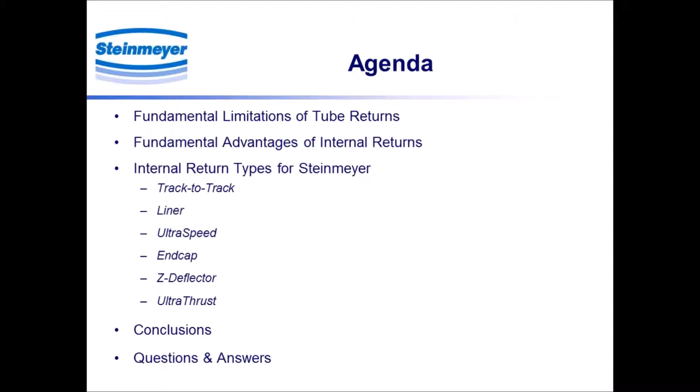We'll get into some particulars about the Steinmeyer design philosophy. And as you see here, a list of really 6 major return types that fill out the Steinmeyer product line. They're all driven by that philosophy. And then we'll wrap up with some conclusions and hopefully answer your questions. So let's get started. And I always like to start with a bit of history. I think it helps to understand where you've been, to understand where you are right now.

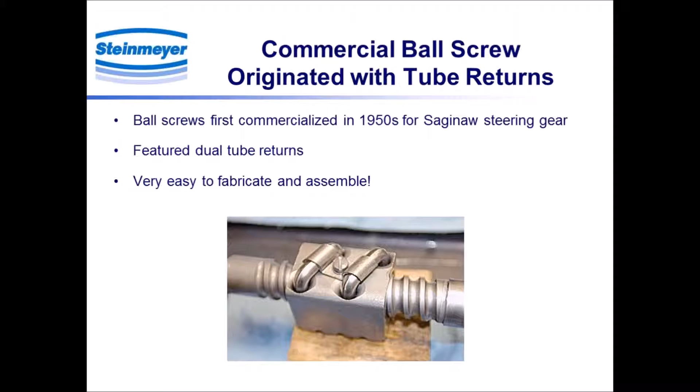Very easy to fabricate and easy to assemble. And that's really how ball screws were first commercialized. And it's very easy to see why that choice was made. You bore holes in the nut body, bend a tube, insert the tube and clip it in, and you're done. So it's a very natural type of design very early on.

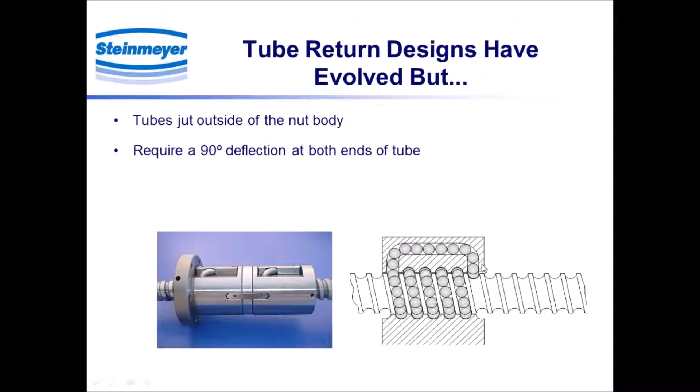Of course, tube returns have evolved, as you would expect, over the years. Here's a picture below of a relatively modern tube return, and a schematic on the right side. But fundamentally, the same limitations and design parameters apply here. You've got a tube jutting outside of the outer diameter of the nut body, and as you can see, this requires a 90-degree deflection at both ends of the tube. When the balls enter the tube here, and when they leave the tube at the opposite end, being applied back on to the track. So those deflections are very extreme.

And as a result of that fundamental design philosophy, tube returns have quite a few specific limitations. This kind of direction change causes higher frictional losses, which generates more heat, and also creates higher variations in friction torque. There's also, of course, a higher risk of ball jamming, and we'll talk about the speed rating throughout the day as well. The DN value is limited to about 70,000, and that's computed as the maximum rotational speed in RPM multiplied by the shaft diameter in millimeters. So for tube returns, you're really limited to about 70,000.

There's also a larger outer diameter required for the nut as a result of the tubes. So size and spacing can be challenging. Also, some type of design feature in the tube is required to guide the ball back onto the track, either a pin or some type of scoop, and those are often very small features which are subject to failure. And we've seen a lot of pin failures out in the field in tube returns, and it's a really significant design limitation of tubes.

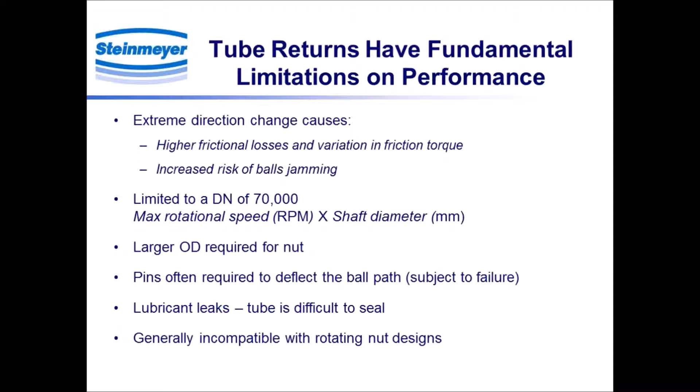Also, there's a lubricant leak possibility. That borehole and tube is difficult to seal, and so you'll frequently see lubrication losses through the nut body. And then finally, tubes are generally incompatible with rotating nuts because of the asymmetrical radial forces as a result of the tubes. When a nut starts to rotate, it can cause some problems at any type of speed.

Now, Steinmeyer uses internal returns, and they're not simple to design. We have a very long history in development there, and there's a lot of complexity involved in internal returns, so it's not an easy solution. And as you'll see in the designs that we discuss today, a lot of complex shapes among our deflectors.

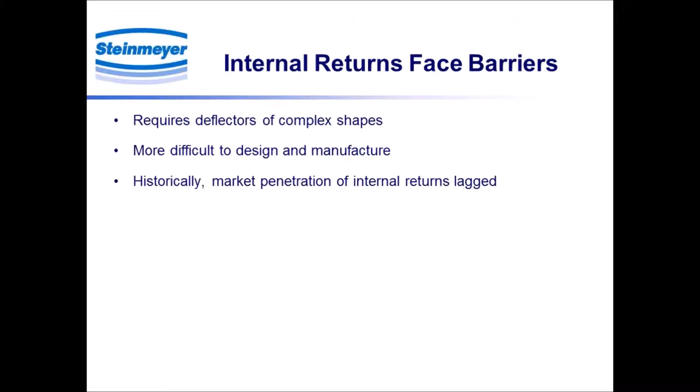They're certainly more difficult to design and manufacture, and historically, internal returns have lagged the market compared to tubes. So we're sticking by our design philosophy of using the tangential deflection, following the natural trajectory of the ball, and thereby minimizing the deflection forces.

And what we've done is to really apply modern design and manufacturing techniques to close the performance and manufacturing gap with tubes. Of course, we're using CAD. We're performing precision machining of deflectors, which is rare in the industry. As I said, you'll see a very wide variety of deflector designs.

And the end result here is higher speed than the DN value of the nuts, higher efficiency, lower heat generation, and significantly higher reliability. And those are very, very important, of course, for almost any application. For industrial applications where servo control and precision servo control is required, that lower torque variation throughout the nut travel is also extremely important. So for all these reasons, Steinmeyer has never used and will never use a tube return.

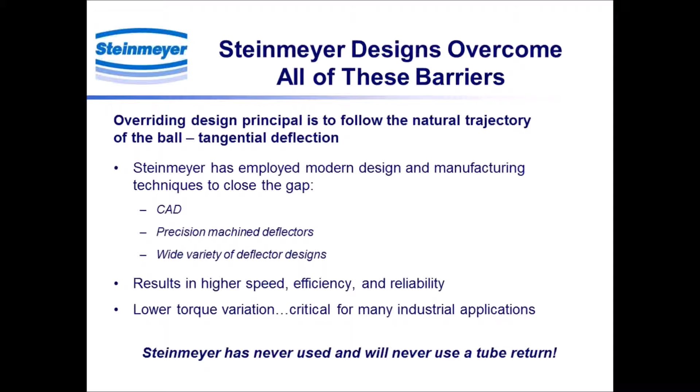This design, the track-to-track return, is available on a very wide range of shaft diameters and nut types. As I said, it's really the workhorse of our product line. It's particularly preferable for small balls and for small lead diameter ratios, typically less than 0.5. The speed rating achieves 120,000. So it's a very significant increase from the 70,000 limitation of tubes, and for that reason is the widest and most popular choice today.

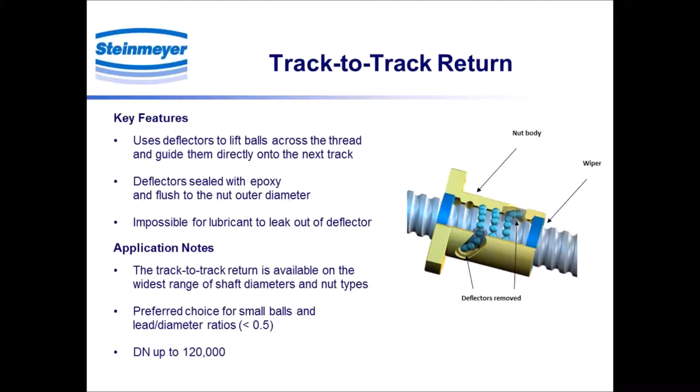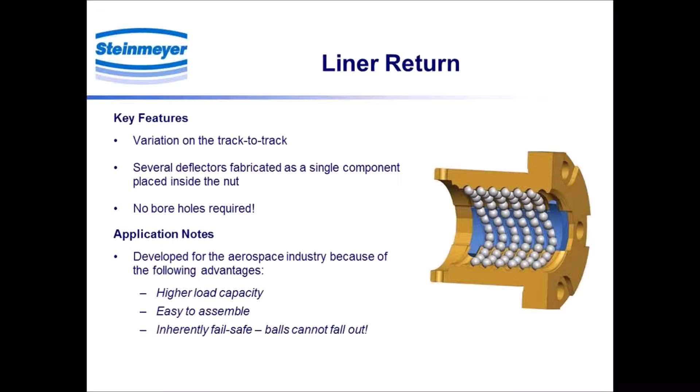Next is the ultra-speed return, and this is really our first through-the-nut return design. You can see the balls in the schematic here returning through the nut body, and actually two return paths here because there are two separate ball circuits for this dual start threaded design. As a result, there's pairs of deflectors at each end of the nut body. Typically, it's designed with dual start threads, and the multitude of balls and return paths in this short nut body also gives a very high load capacity for the length of the nut.

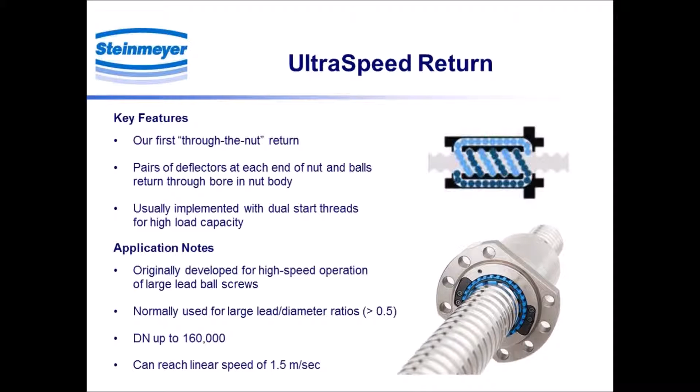In the photograph below, in fact, you see the ends of the deflectors; the black pieces are the ends of the deflectors. So again, they are arranged in axial pairs. This is designed, of course, for high-speed operation. For large leads, where we're talking about a lead diameter ratio greater than 0.5, the track-to-track deflector does not work as efficiently on such large leads, and so this through-the-nut design is preferred. And in fact, it can reach the even higher speed rating with a DN up to 160,000 and a linear speed of about 1.5 meters per second.

Another through-the-nut return we call the end cap return. Again, bore through the nut body for the return path. And this time we have plastic caps at each end of the nut that serve as the deflectors. And that extra length there can also accommodate our combination wipers, which, as you may know, consist of a ring of plastic fingers as well as a felt nut ring, and that all fits inside the length of the end cap, so no additional nut body length is required here.

And these plastic end caps, of course, lower the weight, but also very significantly reduce noise by up to 50%. Many of you have used ball screws or heard them; they can often be quite noisy. This noise reduction is welcome in many applications. The end cap returns are really designed for relatively small shaft diameters from about 5 to 20 millimeters. But they can still achieve high speed, and you see here again the dual start design, which can exceed a linear speed of 2 meters per second.

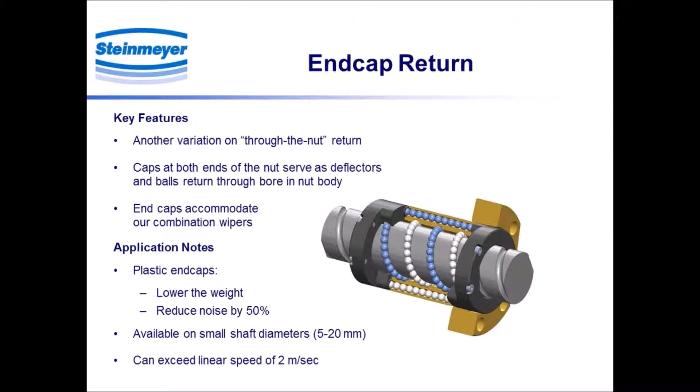One of our newer designs is the Z deflector, and you see it here pictured with the deflector next to the nut schematic. This is our first all-plastic return system. In the end cap, previously we had plastic deflectors. Here we have not only plastic deflectors, but the entire return path inside one integrated plastic piece, which of course fits onto the nut body as shown here.

This is primarily designed for shafts with solid bearing shoulders on both ends, and in that case it's impossible to assemble the nut onto the shaft with the balls. Here you have to assemble the nut and then assemble the balls as a second step, and then fix the deflector, and you're done. So this design accommodates that approach.

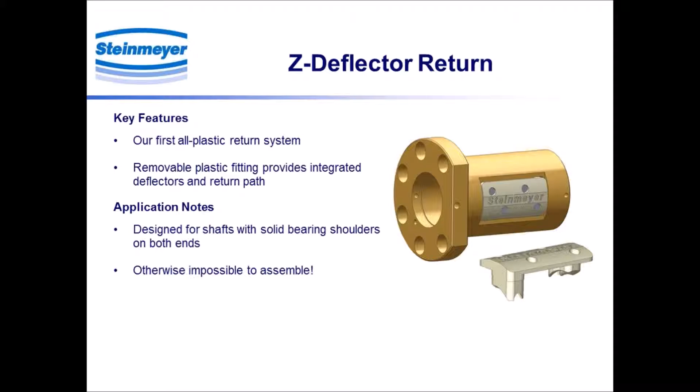We also have the Ultra Thrust return, and this is another utilization of a plastic return system. And here you see multiple plastic returns end to end to accommodate a very large number of balls and very high load capacity. Now the Ultra Thrust line has been around for a few years, and if you've heard about it from Steinmeyer, you'll know that we originally employed the track-to-track return system for Ultra Thrust. We achieved the higher load rating there with large balls, starting with 15 millimeter ball sizes and eventually accommodating 19 millimeter ball sizes, still using the track-to-track return.

This new Ultra Thrust 9 series return that you see here is the newest product in our series, and the 9 series refers to the plastic deflectors that you see here, either 2 or 3 end-to-end to accommodate a very large number of balls and extremely high load capacity, still in a fairly short nut. And this again is accommodating balls up to 19 millimeters. And for the maximum sizes here, we can actually achieve a dynamic load capacity of 1,400 kilonewtons, which is about 140 tons. So that's really the highest extent that we've gone to date.

And the main application there naturally is replacing hydraulics and supporting the use of electromechanical actuators in their place, which are naturally more efficient, more environmentally friendly, and it's a growing demand from our customers, and the Ultra Thrust line is reaching a very, very high load capacity to support that.

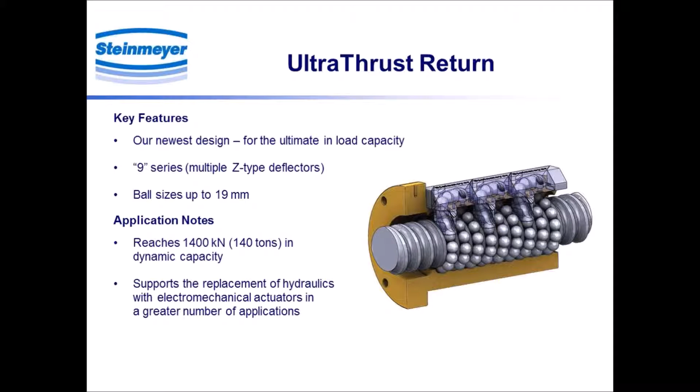So in conclusion, I hope I've explained to you why we believe that internal returns are clearly superior to tubes. That's our fundamental design philosophy, and it all revolves around tangential deflection, and that's going to deliver higher speed, higher efficiency, and higher reliability across the product line. Without any tube connection on the nut, there's no loss of lubrication. That's another very significant advantage in many applications.

And what we've done at Steinmeyer is to bring together modern design and manufacturing methods to allow internal returns to achieve very widespread adoption without any kind of a cost penalty, but delivering very clearly higher and clearly more desirable performance across the product line.

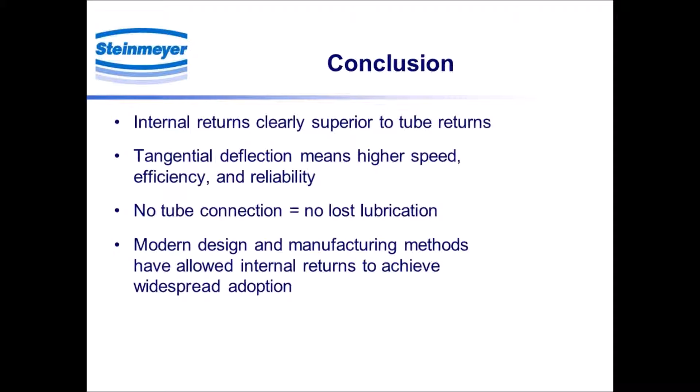How prone to failure are the plastic track-to-track return inserts? Well, they're very reliable and very stable. Of course, we have an enormous amount of field experience with that. I should add that we produce the track-to-track deflectors in both metal and plastic. Our field experience with those is very deep, and they are extremely reliable. And keep in mind, with the track-to-track, we have really minimal forces on the deflectors because it's just lifting the ball to the next track.

The angle of deflection is very small, and the loads on the deflectors are consequently very small as well. So we have a great amount of confidence in their reliability.

Bruce, there was a similar question asked beforehand. What are the materials that the deflectors are made out of? I'm not sure of the exact material, and of course you can imagine some of the information is going to be proprietary. I will say that if you have the chance to visit the Steinmeyer factory, I would encourage and invite anyone to do so. You'll see an enormous amount of attention paid to deflector fabrication, and that's one of the uniquenesses and strengths we have in the marketplace. Some are metal, and the predominant plastic material that we're using is probably a form of PEEK.